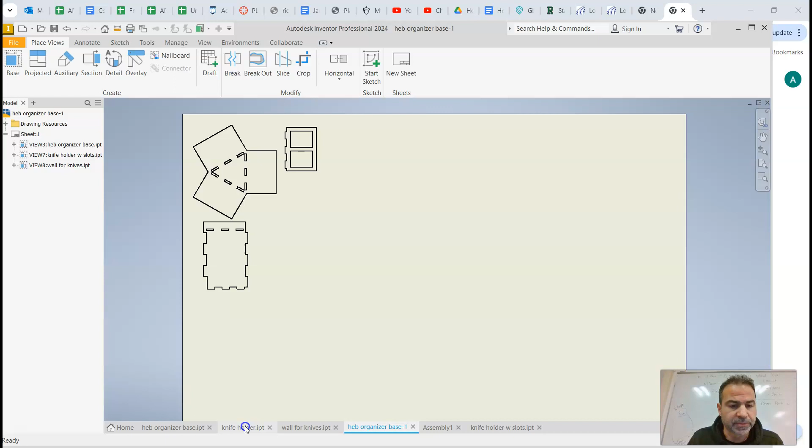Step one is to create a part file. You don't need to extrude it, by the way, you only need to have a sketch. The sketch is here under the extrusion. Notice if you ever have to modify your sketch, right-click, edit sketch, and then you can get into your sketch. So let's say I'm trying to laser cut this pattern.

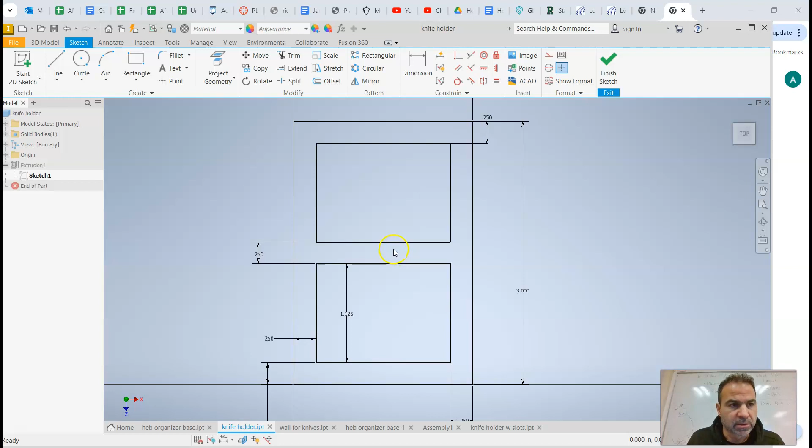Since I've already created the part file, I can now say File, New, Drawing. Now I don't need the border, so right-click, delete. And we don't need the title block, right-click, delete. Now we have a nice blank page.

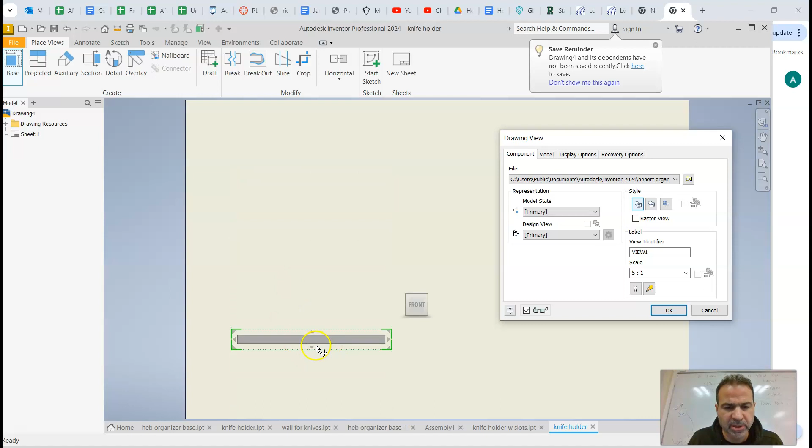On the upper left-hand corner, click on Base. Then if your drawing pops up but something doesn't look right, you might have to rotate. I'm going to have to rotate the navigation cube because I drew it on the XZ plane, so I need the top view. Make sure that your scale is 1:1. Notice that mine is not. So this would be small - I'm sorry, that would have been large.

So 1:1 is correct. If you can't find the file that you need, you can use the drop-down menus or the search to find the file you're trying to laser cut. But if you have it open, it'll pop up.

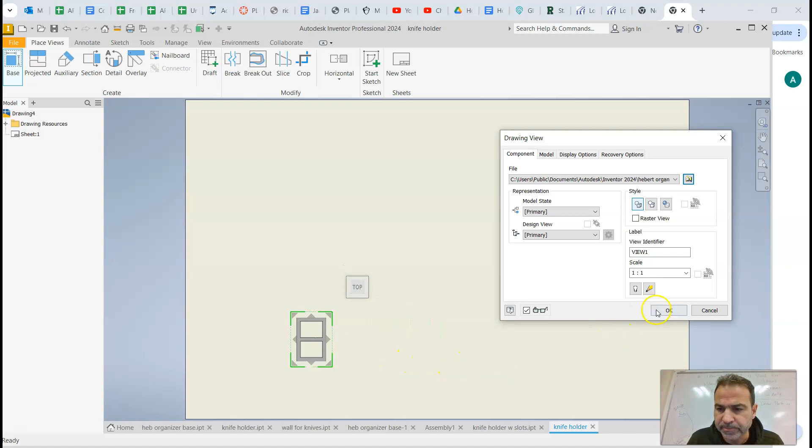Now I don't want to leave it down here. You want to hover until you see the dotted lines and then click down on the left hand side and drag to the upper left hand corner.

And then you're ready to, well, first of all, you want to save this. Go ahead and hit File, Save, and then save it to the same location as your other files for this project. And then you want to export it.

So File, Export, PDF. Make sure it says PDF, okay? It should. File, Export, PDF. And then you want to save it to the correct location. You probably want to put it in the folder where you have your other files. Or you could, for simplicity, put it in Downloads, so it's easy to find, but then it's not really organized. Anyway, go ahead and hit Save.

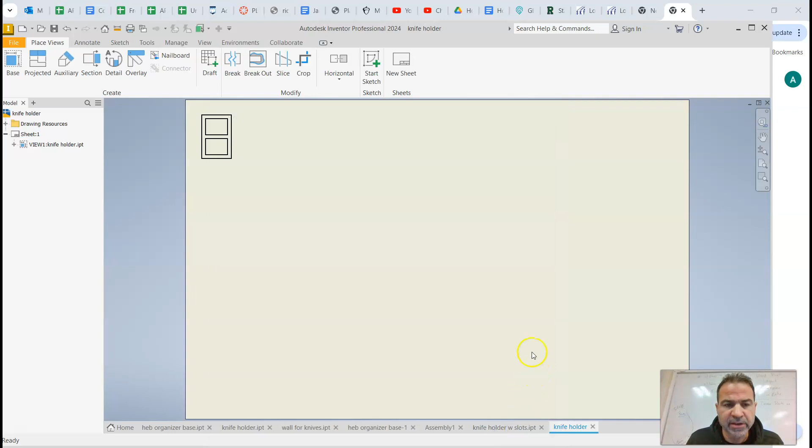And now, when you go to Glowforge, right? When you go to Glowforge, I'm already logged in. If I were not logged in, I would have to log in.

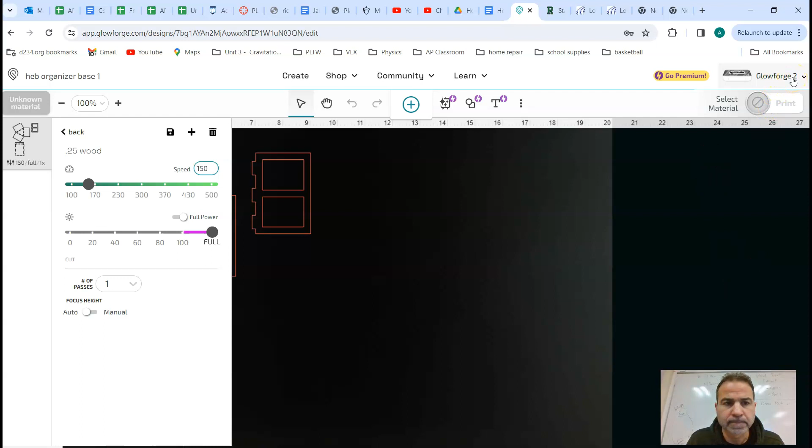Let's show you what that looks like. I'm just going to go to glowforge.com and I'm going to sign out. So this is what it will look like. Actually, it won't even look like the sign-in page. When you go to glowforge.com, it'll look like this.

You have to sign in. Okay, you're going to use my email. Be careful, it's not rebels, it's just ridgenet.org. The password is GLOW1111, so glow1111.

Okay, and then you'll hit create new design, upload file, and then you have to go find that file. So I'm going to go to my downloads, and this is not the file that I downloaded. So I didn't pay attention to where I downloaded it to.

So let's go back. File, export, PDF, put it in downloads. It's called knife holder. Oh, that was it. So knife holder, you can see the date and time, so I know that's it.

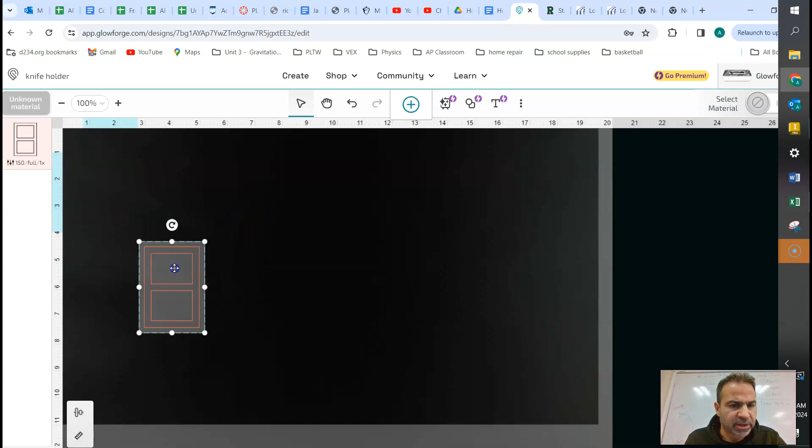Okay, click over here somewhere and notice the settings are recorded. When it's your turn to laser cut, you'll place a piece of wood in and make sure that this is where there's no holes on the wood. Okay, and then you'll click unknown material, uncertified, and the thickness is 250 thousandths of an inch. You'll hit submit.

Make sure you're on the correct Glowforge machine. You come up here, you can select Glowforge or Glowforge 2. Glowforge 2 is the one in the little back room near my desk. And then hit print. This is the print button, and then you're good to go.